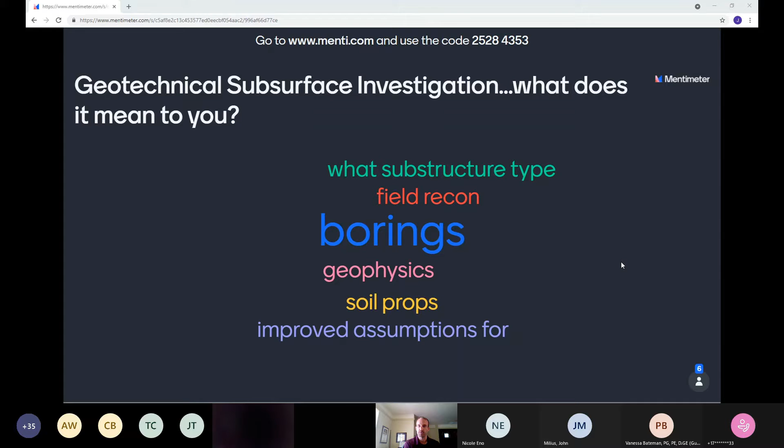All right, so it's good to see that somebody wrote borings, plural, not boring. Field recon, soil properties. Curious to know if anybody has any feelings on the idea of the cost or the expense, which is really going to be what Georgette and Vanessa go through us today. Is what happens if you don't put in the right efforts at the right time throughout the project cycle.

Valuable. Okay, I think Georgette and Vanessa put that one in there. Thank you guys. All right.

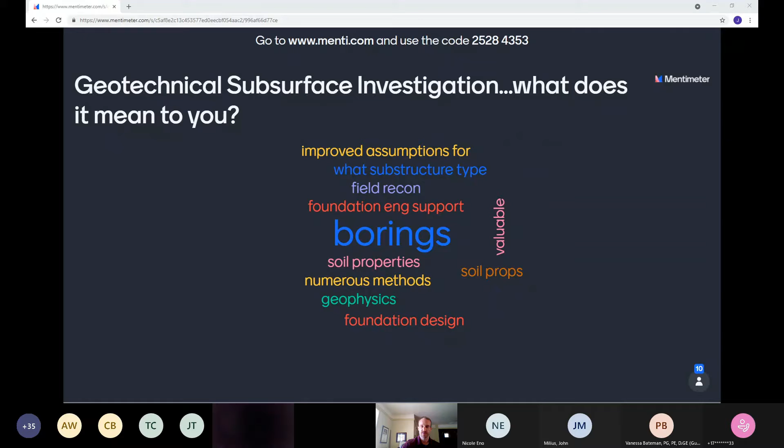So with that, I'm going to, it's all very technical answers, but borings is the highest one. So with that, we'll go back to the presentation here and introduce our speakers, and then let them take it away.

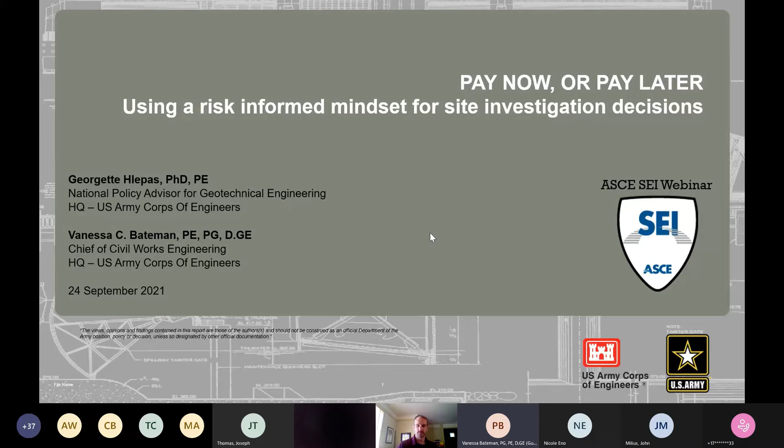I really appreciate the invitation today. As I said, this is a subject near and dear to my heart, and certainly near and dear to Georgette's as well. Okay, so risk is one of those squishy words.

People use it to mean a lot of different things. We all have different conceptions of what risks we can tolerate, and different conceptions sometimes of what risks are involved in things. So when we're starting to talk about risk, we need to think about what do we mean by that? What do we mean by that for our organization, personally, and for our project? Because certain risks are acceptable in other parts of life that may not necessarily be realized on your project.

And not every project is going to have the same level of risk. If you're doing a pole for a stoplight in layer cake geology, an area that's well explored and everybody pretty much knows what it is, the risk in the subsurface for that project will be entirely different from something that is structurally complex, or something in karst terrain. So there's a lot we have to think about, and we need to think about it in a much more structured manner. Communication is one of the biggest things here, because we need to make sure we're all using the same words, and that those words mean what we think they mean.

Risk is present throughout the project life. It's in every phase of our project. We have risks that can be realized in planning, in engineering and design. We have risks that can show up during construction, and we have risks that can show up during long-term operation.

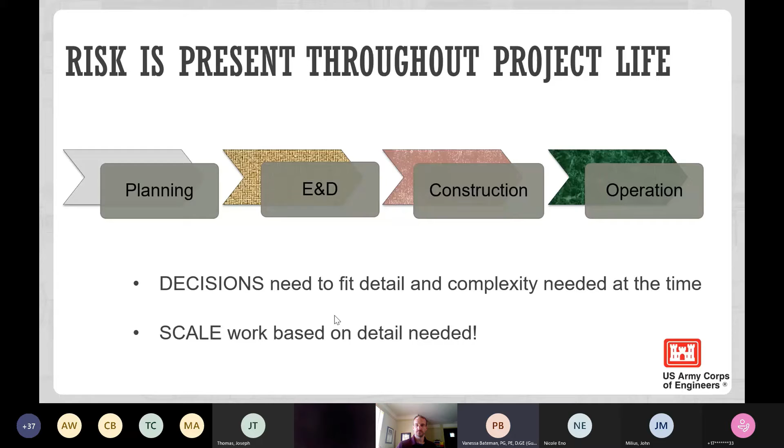Now, what is one of the biggest uncertainties we can deal with out there? It's the subsurface. If you don't know what to expect when you're laying out a site investigation, don't be surprised when somebody misses it. One of the biggest mistakes as an industry that we make—I saw this many a time, particularly in my early career—someone would say, I want this many borings. We're going to put up this square building, go drill one hole on each corner, and then write me the geotech report, and I'm going on from there.

I'm going to build a bridge, and we can't really afford all the time it's going to take you guys to get that drill rig out there, so just do one boring per pier. Well, that can work in the right circumstances, and I had many a successful bridge project with just a few borings. And I had many a not-so-successful bridge project when we said, oh, you know what, we're not going to do what we need to do to actually manage the subsurface intelligence.

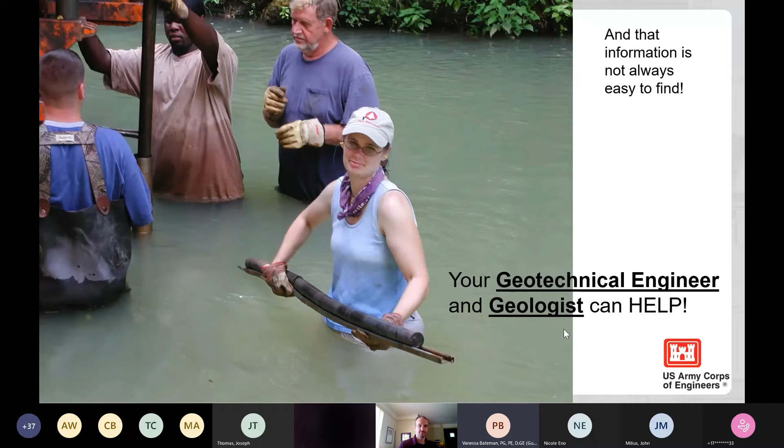So the information's not always easy to find, but don't worry—your geotechnical engineer, your geologist can help you, because part of their job is to understand the environment that you want to build your structures in. That knowledge is absolutely crucial for planning a good investigation. So, where are you in your project? How much uncertainty can your project take in what phase?

Now, if we're doing a little bit of a desk study and we're just thinking about whether or not we actually want to build this thing, we don't need the same level of detail that we're going to need during design, and we definitely don't need, in the early stages, the information that we may need during construction. And it can be asymptotic, right?

We get a lot of information to get started. We walk out there and get a look at things, and then we plan out our main investigation. And then sometimes you have to come back and get supplementary investigation.

That's the part that often drives project development teams crazy, is when you've gotten all this information and you realize, wait a minute, there's a risk here, there's uncertainty here that we haven't defined, and we didn't plan for it in the project schedule. And now you've got somebody coming in saying, about that, we need to go do this many more borings and some geophysics. And your project manager at this point, head's exploding, saying, well, why didn't you know that before?

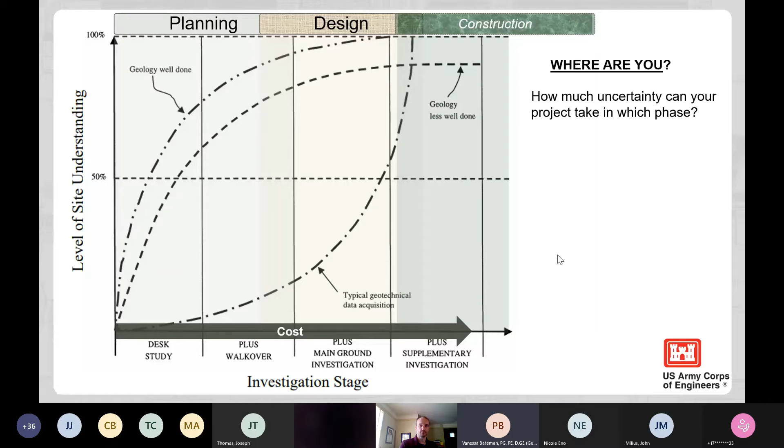Well, in some cases, we couldn't have known that. So you've got to think about where you are in the phase of the project and how much uncertainty you could tolerate. Because it's okay to make a decision that we can tolerate a certain amount of uncertainty if we can bound what those consequences are, talk about what that risk is, and sometimes the right answer is yes, accept it. Many times, however, we need to be very careful about understanding that you can accept a risk that is a little bit more than you can chew. So you need to be careful about that.

Site characterization is something that builds over time. Understanding of the ground conditions is necessary for on-budget and on-time engineering. Models are continually refined over time as understanding improves. There's a lot going on down there in the subsurface, and we need to make sure our models actually reflect the reality of what we're dealing with.

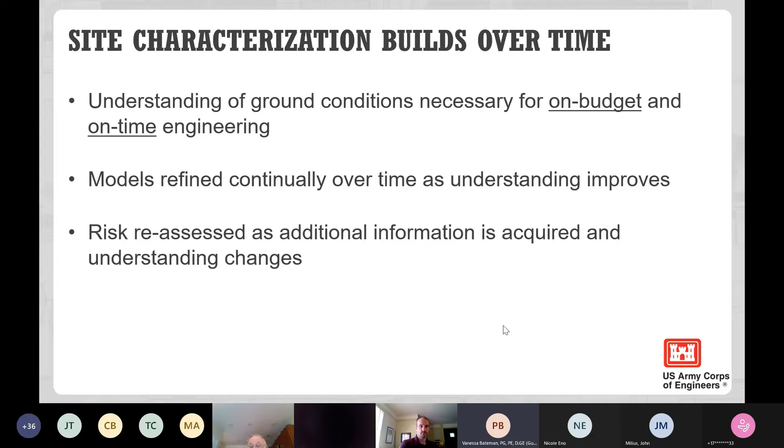And then risk is reassessed as additional information is acquired and understanding changes. And that's, I think, part of the frustrating part for some people: you expect just one answer. And that's great, we love to only have one answer. But the problem is, if I only give you one answer in the planning phase, and when I find new information in the engineering and design phase and don't take that into account and make adjustments, then my site characterization that provides you the information you need to design these foundations can go wildly wrong.

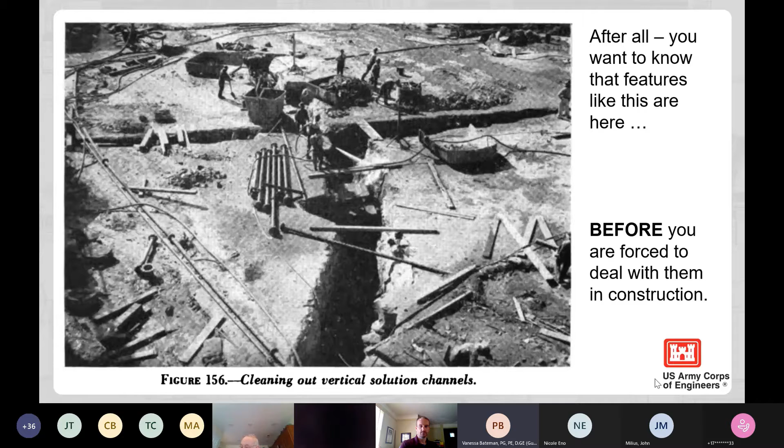This picture on your left is from one of my projects. This is not what you want to find underneath your bridge spread footing. So this was actually a contract job, it was one hole per bridge pier. The rock was absolutely gorgeous, no flaws in it whatsoever.

But what are you looking at over here on the left? Right, large karst feature, right underneath one of the substructures. We had to redesign the footing in the field, right then. Okay, so one hole per pier, that may be appropriate in the right circumstances, but it is never what you should assume for every project, right? You need to be talking to your geotechs, talking to your geologists about the level of uncertainty and the problems that the ground can present.

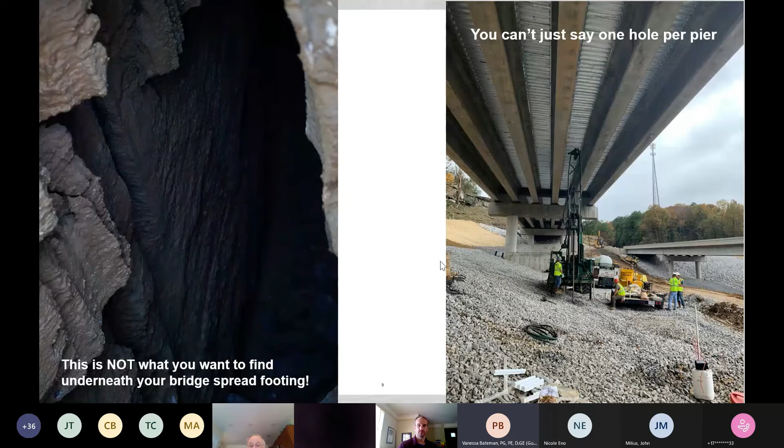And we should scale our investigations based on that information. So let's look at another example. This is, I love this picture. We've got a geologist for scale here on the left-hand side. So if we put one borehole in, well, I might see an enormous cavity right here where my geologist is standing. I might see pretty good rock, and they can be right beside each other.

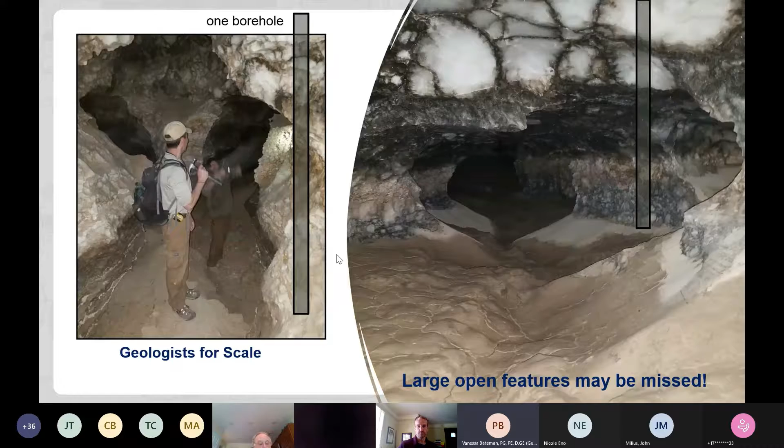And the way you deal with that, because we're never going to drill everything, we're never going to have the perfect number of holes, is you have to understand what the ground is likely to be presenting to you and design your site investigation around that. So again, it's this kind of risk decision making where you're thinking about what could go wrong, what happens if it does go wrong, and what do we do about it.

So this is just a little diagram, actually out of the best practices manual that the Corps and the Bureau of Reclamation put together. Evenly spaced boreholes that are vertical may not be what you need.

In this case, this is actually a rock cut. We've got some relatively evenly spaced borings, and this tan stuff is soil. The dashed line is the interpreted top of rock. Now, if you saw this with just the 3 borings, you'd think, oh, okay, fine, and maybe you wouldn't even think about it. But now that I can show you the overlay of what's actually in the ground, you can see very easily how 3 vertical borings can really mislead you about what's happening.

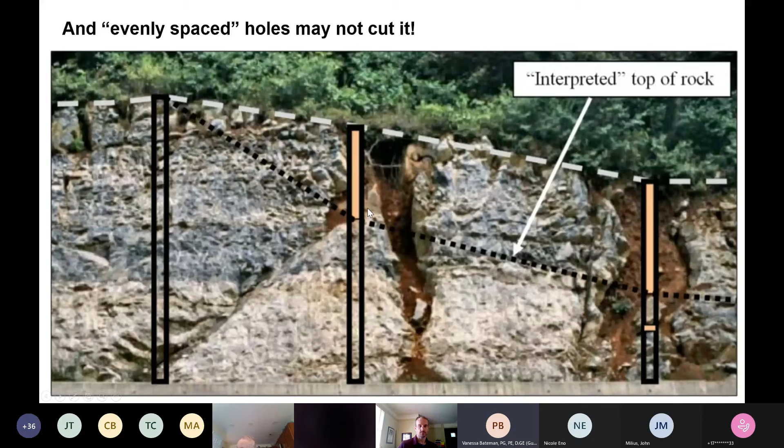And you can imagine there's definitely a different construction cost if we have to remove all of this rock and we thought that was soil. So a lot of times what we'll end up doing is rejiggering how we do things, maybe adding more boreholes. Look at the blue line versus that black dashed line for where the top of rock actually is.

Also, when you've got vertical features, we do a lot of inclined holes. Inclined holes can be a little more expensive, and they're not appropriate for every situation, but we routinely do this underneath dams when we do grouting projects, precisely because vertical holes are really, really bad at capturing vertical features.

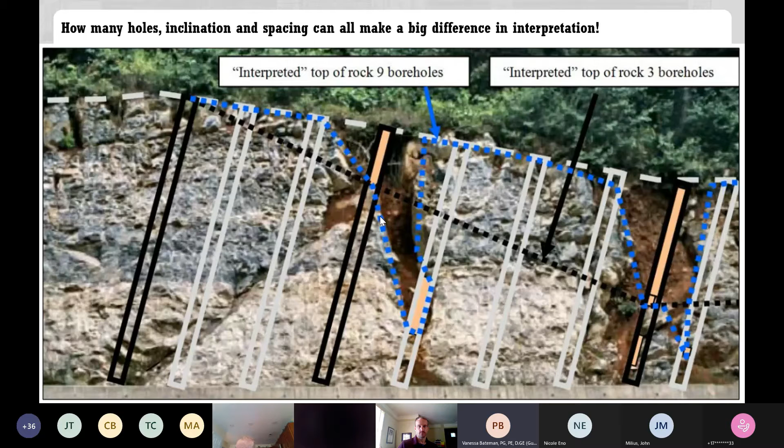They're easy to miss. So think about what the problems could be with how you're designing your investigation, and then roll in from there. Let your geotech and your geologist help you. Here's the site—come back and tell me what you think you need.

Let's have a discussion over the risk tolerance that we have for this project, the schedule that we have for this project, and let them pull some old information, because what you may find is there is a lot of old information that would be extremely helpful for how you're planning out your site investigation.

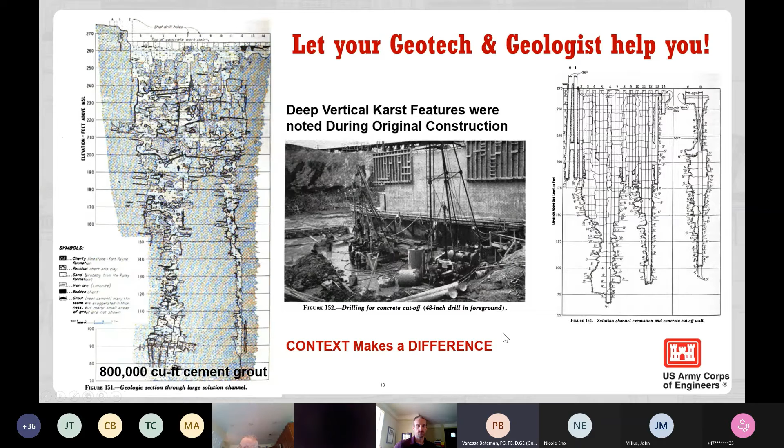This is actually from Kentucky Lock and Kentucky Dam. Massive vertical karst features beneath that. We're actually in the middle of constructing a new lock at Kentucky Lock, and we knew, because of the previous construction, to expect features like this. So that was incorporated into the design.

Because you can anticipate this, you're going to reduce the impact of cost and schedule risk on your project. If you suddenly find a massive karst feature like this underneath your lock construction, and then you have to negotiate how to deal with it in construction, of course it's going to cost more, right? That's going to make life more difficult for everybody.

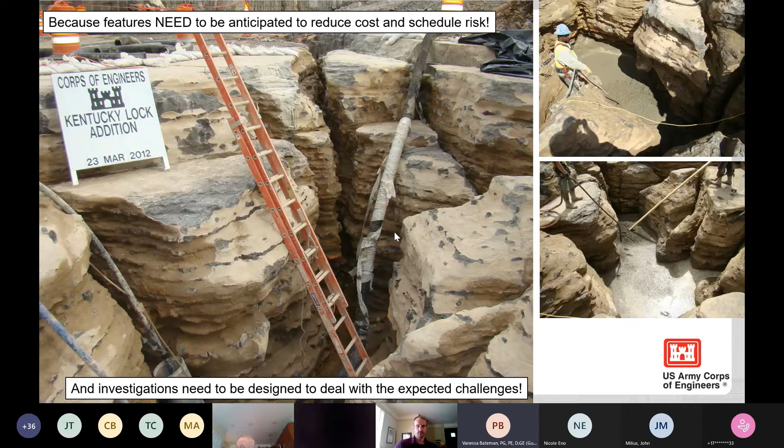So we've got to design our investigations with the idea that we need to understand what's happening in the subsurface first, or what's likely to happen. So what are the kind of risks that we're talking about? Well, we're talking about risks that lead to certain consequences. I'm not worried necessarily about risks of, say, so-and-so didn't read my report.

Project design failure—the design does not work. That's a big risk; we don't ever want to see that. Life loss or safety implications—that's definitely a problem. If our bridge falls down after we've built it, it looks bad on everybody. Property damage—you definitely don't ever want to be in a situation where you have life loss from your project, or property damage that adds to the cost of the project.

Project cost growth and schedule delay—how critical is that schedule for you? Maybe this is the first in a series of projects, and if this one misses it, it has this cascading effect on a whole bunch of other projects. And cost growth—everybody's always going to be concerned with how much something costs. When we make promises on projects about what the cost should be, our clients, whether you're working for a private AE firm or for the government and it's the taxpayer, they're going to want to know why suddenly it costs so much more. And you have to be able to explain that.

And then there's also public perception and reputational impact. If something goes badly wrong publicly on a project, that is a risk, and it can lead to problems for your organization.

So why do we face these kinds of consequences? There's been a lot of ink spilled over this over the years. This one's from 1981: 90% of dam failures in history have occurred because of oversights that could have and should have been avoided.

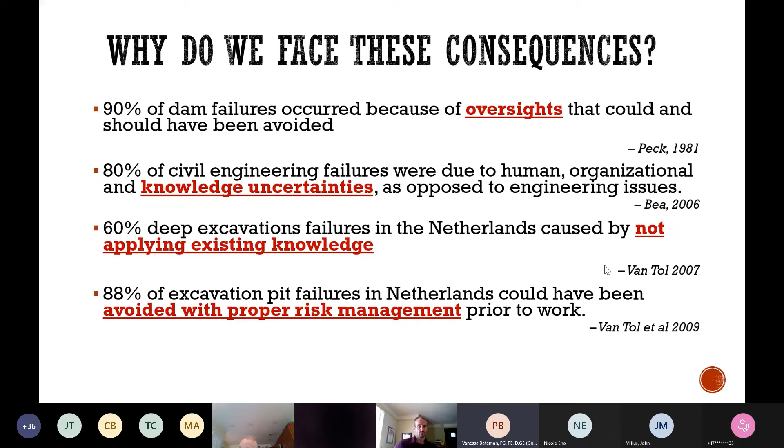88% of excavation pit failures in the Netherlands could have been avoided with proper risk management prior to work. Wow, those are some big statements, and all of these are published in the literature. This is nothing new, and as you can see, from 1981 to 2009, there are plenty of other examples in 2020 and 2021.

All right, subsurface related impacts. 80 to 85% of European building failures are related to ground problems. That's from 2004, and I don't think we've gotten that - we've gotten that a lot better.

50% of project delays are caused by adverse ground conditions. Despite the absence of definitive statistics, most experts would agree that the incidence of geotechnical disasters has increased over the last 20 years. And that was written in 2011.

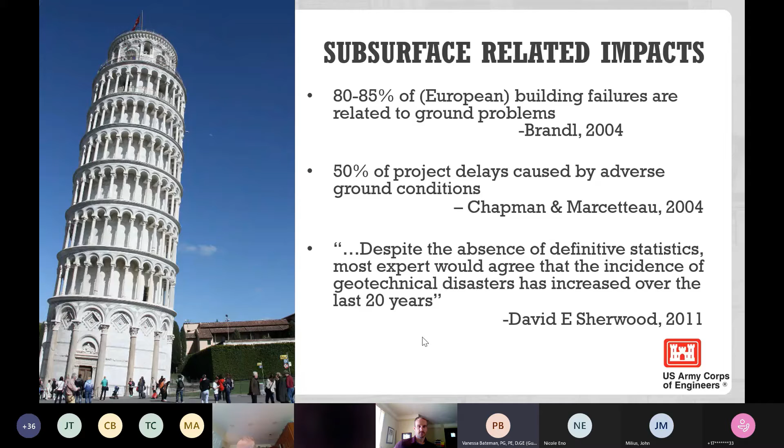Wow. Okay, now I know I'm talking to a bunch of structural engineers, and you probably are all going, yeah, you geotechs, man, you don't know anything. Well, we do. There's a lot of issues that go into this. There are a lot of decisions we can make in a project that bake risk in, and people don't always realize where they're baking that risk in. That's one of the reasons why, as an engineering team, we've got to be communicating back to our clients, project managers, and stakeholders what the risks actually are versus the costs and benefits of the project and the costs for construction.

So a couple of examples of some geo-related risks, right? Soil and rock mechanical properties - this is a picture of one of the cutoff wall constructions. If, through a dam, the rock is significantly harder to cut than we think, that is an expense. Depth to rock, unexpected subsurface materials, groundwater elevation and pressure changes, internal and surface erosion, and insufficient investigation to sufficiently mitigate the subsurface risk - that's really what gets us.

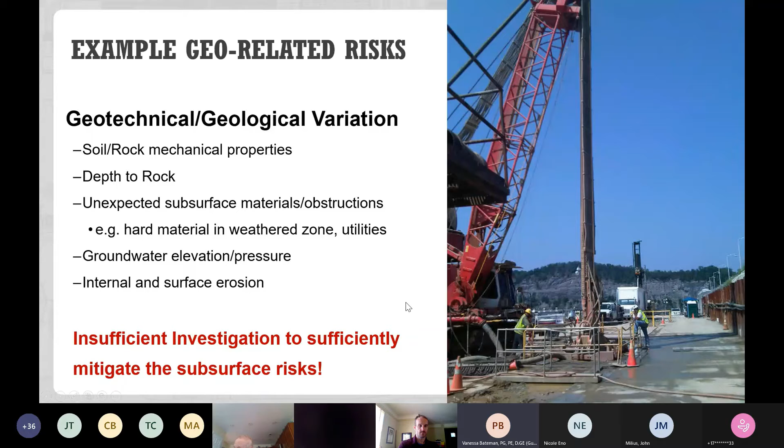All right, so this is from an NCHRP study - this is a bunch of highway departments. It's not entirely comprehensive, maybe it doesn't capture absolutely everything, but they came back to the highway departments and agencies and said, hey, how much are you spending on subsurface change orders? And they're coming up with rather a lot of money. Qualitatively, it's a priority concern for most agencies, but many agencies were not able to actually quantify the exact amount.

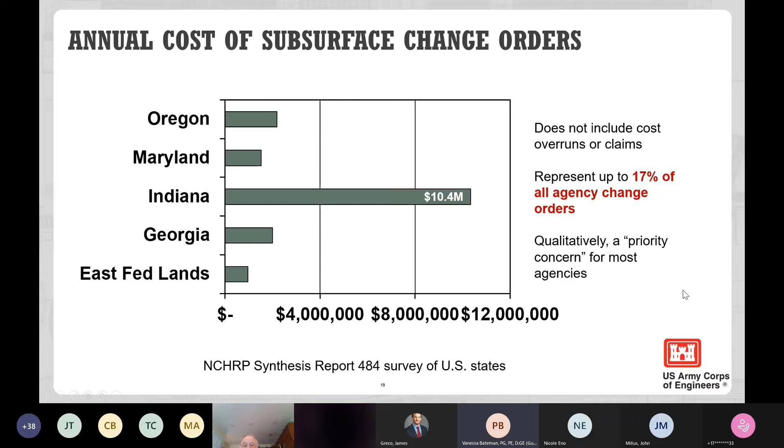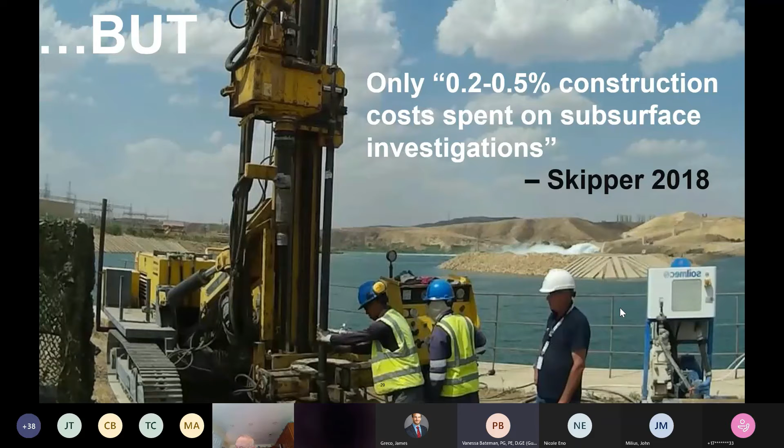But you can see here from Indiana, it can be a fairly substantial part of their budget, representing up to 17% of all agency change orders. But we're spending only 0.2 to 0.5% of construction costs on subsurface investigation. So you've got to stop and think, hey, wait a minute - maybe if I'm slicing the site investigation down too far, that has a cost we are realizing later in the project.

Now, at Corps of Engineers, we've been looking at some of this as well. We definitely have some of these issues, and what we're seeing is that it varies across project types. On a really big project, we do a ton of investigation, and you see these claims be a lot smaller. But in terms of total cost for our program, roughly in the last 5 years, it's accounted for about $25 million each year.

Well, that adds up after a while. That's money that, if we could anticipate ahead of time, could be spent on other projects. And certainly we've got a number of delay days - again, this sounds like a lot, but this is not one project, this is the entire civil works portfolio. Roughly, it's coming out to, in some of our early numbers, about 3%. Well, if we're going to pay 3% on the back end and only 0.5% on the front end, we have an opportunity here, right? We have an opportunity to make things better. Now, sometimes these things are unavoidable.

There are residual risks, and we're going to talk about those in a minute. But there's definitely an opportunity here to save some money, to do a little bit better, to push things forward, and to have more funds available for other projects.

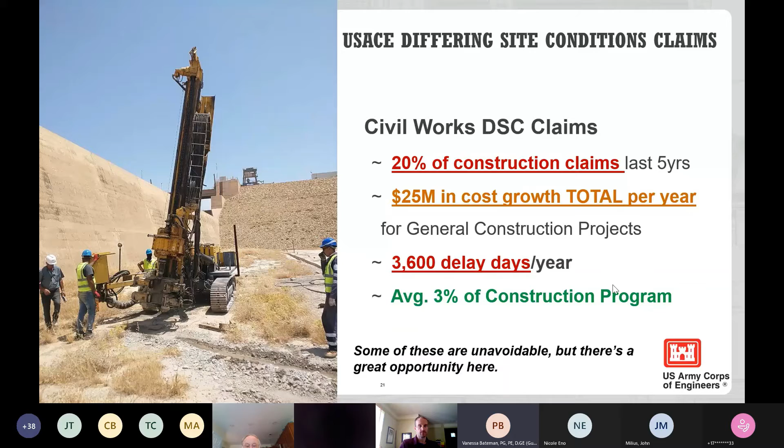This came out of the NCHRP study, along with a couple of USACE data points. What you notice is there's got to be an upper bound. The answer is not 40 million borings. The answer is the right borings at the right time in the right place, using the right tools. But we can definitely see that when we're not spending very much on our geotechnical investigation, we have a whole lot more spread and cost growth.

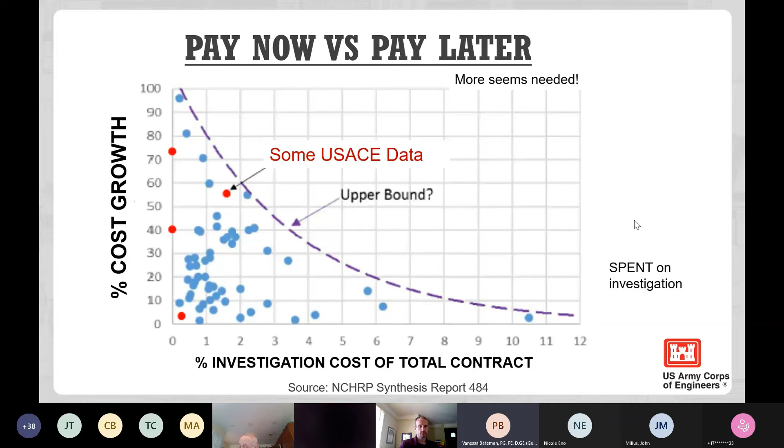So a lot of folks are looking at this kind of chart, gathering even more information, because we want to try to define this a little bit better. We want to go after the right projects as well. You may have some kinds of projects where you have very little problem, and certain types of projects where we have a lot. We want to be able to look at that and define it.

So how much info do we need? Drilling more holes is not necessarily the answer. I love a drill rig. I started out my career behind a drill rig. And I've definitely been the person everybody's rolling their eyes at in the room, saying, oh my gosh, she said she needed 5 more holes. But there is no one size fits all.

You've got to come at this with a risk mindset. You've got to come at this with good engineering judgment. And you've got to think about what is the price we are going to pay if it goes wrong. That's the kind of thing you need to be making sure you're bringing in.

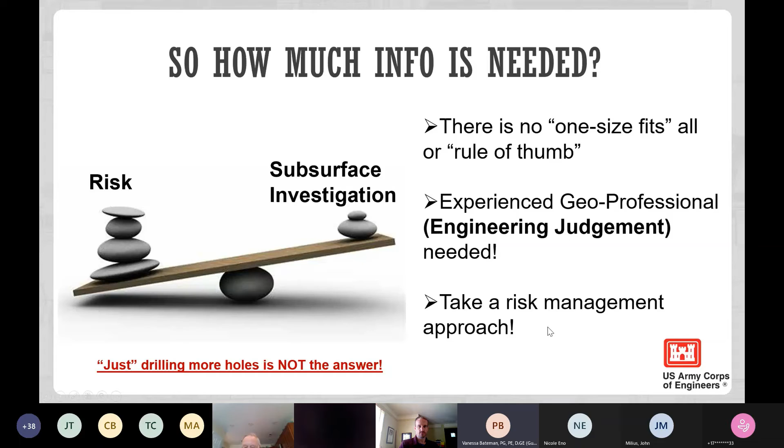So I'm going to get into the discussion of risk management. The definition is a systematic process of identifying, analyzing, and responding to risk for the entire project life cycle. I put that in there because it's something you're going to look at from planning through engineering design and through construction, all the way into operation and maintenance, to make sure you understand what is going on in your project and what information is changing your understanding over time.

So in order to do a risk management process, you would start out by first sitting down with a team. And of course, when it's a project that involves anything founded on land, you're going to need a geoprofessional. You need a geotech or a geologist, and typically both would be preferred, especially if you're drilling into the subsurface, to help you identify risks.

You're going to identify your geotech risks, your hydraulics risks, your environmental risks, all of those in a portfolio fashion. For geotech risks, you'll work with your geoprofessional to establish, now that I've identified those different types of risks — like where's top of rock, and could I miss that, or might I have a dewatering issue — what is the likelihood that I'm going to have that realized, and what are the consequences? After I look at that, I'm going to rank those risks and prioritize what I'm going to address, establish a path forward, and then manage the risks over time and update my understanding, making it a living type assessment.

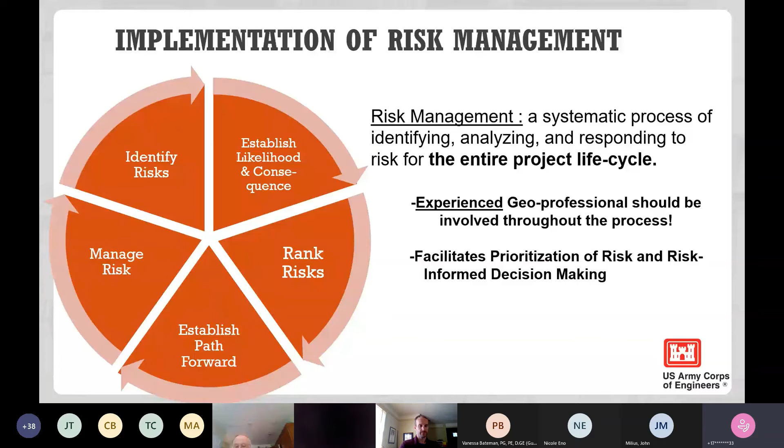Okay, so I'm going to walk through — once you've identified what the risks are on the project, and we're not going to go through that exercise since it would take some time with your team, but once you have, you'd walk through each and every risk systematically and identify what is the probability that risk is going to be realized.

This is for a specific project that we use, and this might be different for your project needs. The idea is to communicate with the team, what do we mean by a very high probability or a very low probability, and all be on the same page and establish that for the risk. Then you're going to go in and look at, now that I know what the likelihood is, what are the consequences of the risk being realized?

If you could forward a slide.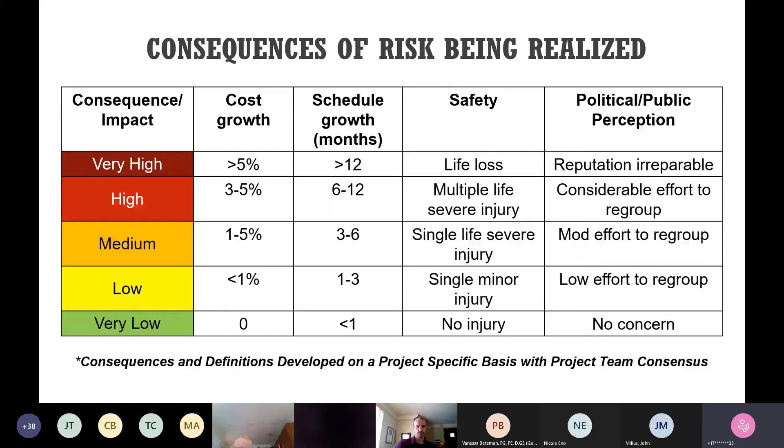But once you've sat and identified, okay, what are my risks? What are the likelihood of occurrence? And where's the probability? I'm going to put that all together in a risk matrix. Again, this is for each risk. And I'm going to say, well, if I have a very high probability and very high consequences, man, that resultant risk is really severe. I'm concerned about that, so I'm going to put that as a high priority to address in some way.

If it's maybe a medium probability with a very low impact, okay, you know what, that's considered a little more minor. So I might not want to address that the same way I would address something that had a severe resultant risk. And of course, if you had something with very low probability and very low consequences, that could be negligible, and you can maybe even look past that one and really focus your priority addressing those severe and substantial risks.

Let me go to the next slide.

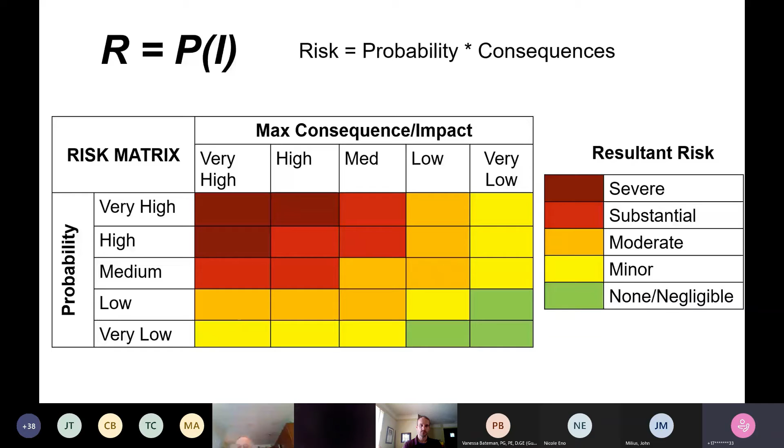You might say, you know what, I think I have a really high risk of not really being able to build this project here, because I think the top of rock is really not low, but I don't know for sure. But as time progresses and you obtain more information, do some subsurface investigations, you're going to have an increase in your confidence and your understanding of what's going on, and you're going to readjust what you think that risk is. And it's either going to go lower or higher, and it's going to make you change your decision on course of action. And that's where I'm going to get to next, is this established path forward.

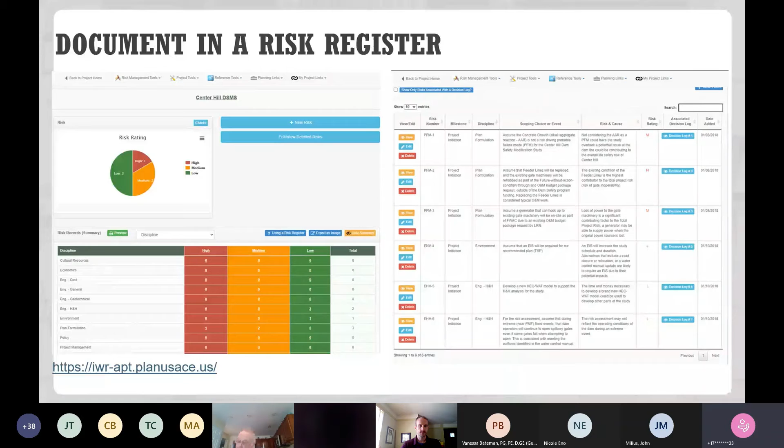You could transfer the risk. You could say, hey, you know what, I'm going to put the risk on the contractor and say they're going to deal with it. But of course, that's going to come with a pay increase on the actual contract cost. You could say, you know what, I'm going to avoid the risk. I'm going to change the project plan and try to eliminate that risk and protect the project from these impacts. That could come at a cost as well, and it can also come with upsetting some folks who wanted the project to look a certain way or be in a certain place.

The other option is to accept the risk. You could say, hey, you know what, I'm okay with this risk. I think it's fine. I have built in some contingency. I'm going to go for it. And if it happens, I will plan for it, and it'll be okay. And that's done in a lot of projects. Next slide, please.

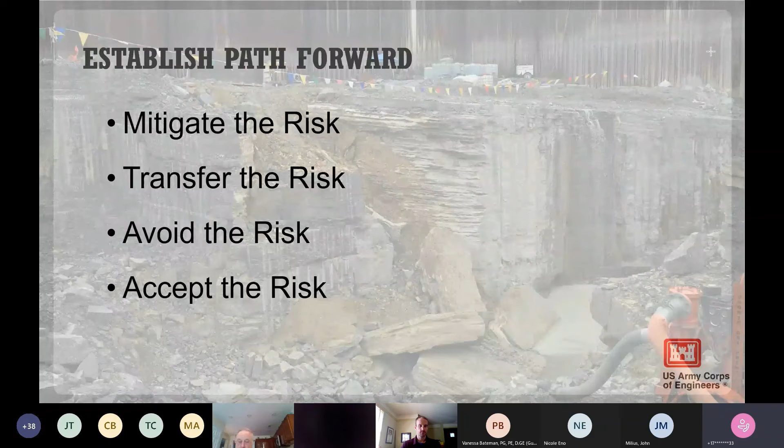Making sure we don't just do this once and walk away and say, at the beginning of the project I've identified my risks, I think they're low, I think they're fine, we'll keep going. It may happen as you progress through the project and get more information, you realize my risk is a little higher than what we originally estimated, and we need to change our plan over time to make sure we're mitigating appropriately, or walking into it with eyes wide open.

We have to communicate the changing of the risk over time. Vanessa touched upon that at the beginning. As you go from planning into engineering design, there's always a question: you got some subsurface investigation, that should be enough, why do you want more? Well, our understanding is changing, we see something here we didn't see before, and communicating that is critical. I'll show you some examples of using visualization to help with that communication in a minute. But that new information can definitely be a game changer.

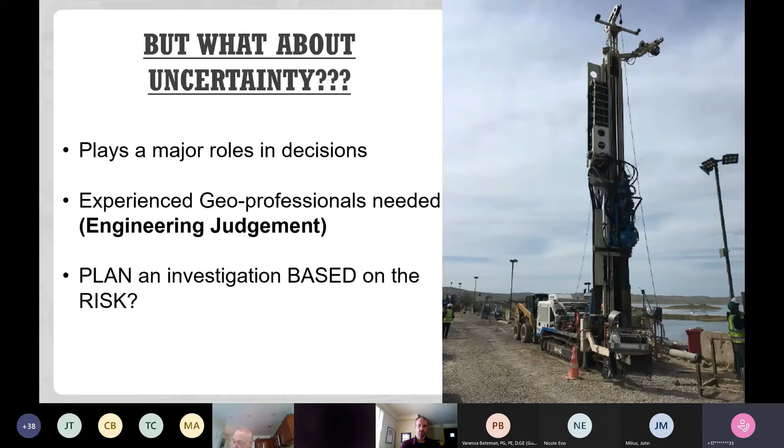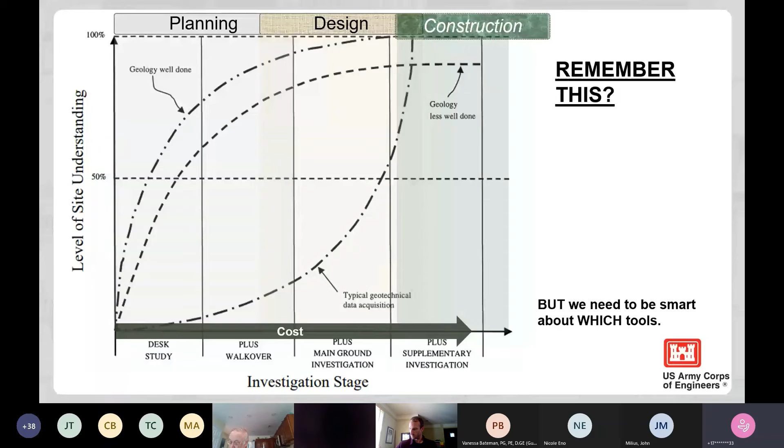There's a lot of tools out there, but you need to consult the geoprofessional and say, hey, can we use some CPTs here instead of borings and maybe gather information that way? Would that speed up the process? Is that sufficient for this project? Your geoprofessional will tell you, yeah, we can fill in some of those data gaps and provide you more information and identify other areas that we might want to target a little closer.

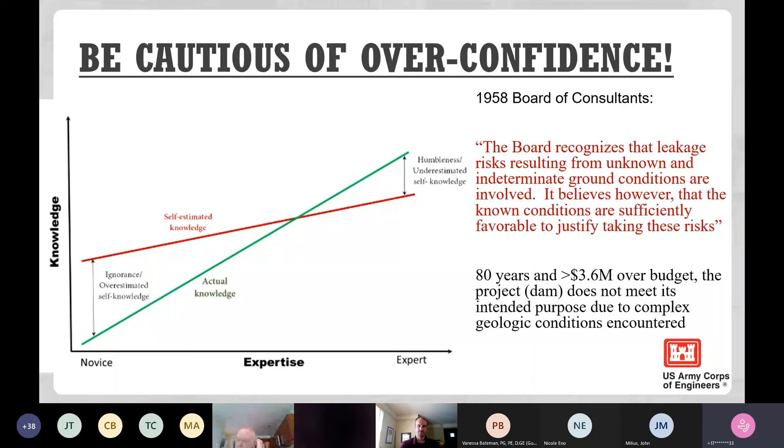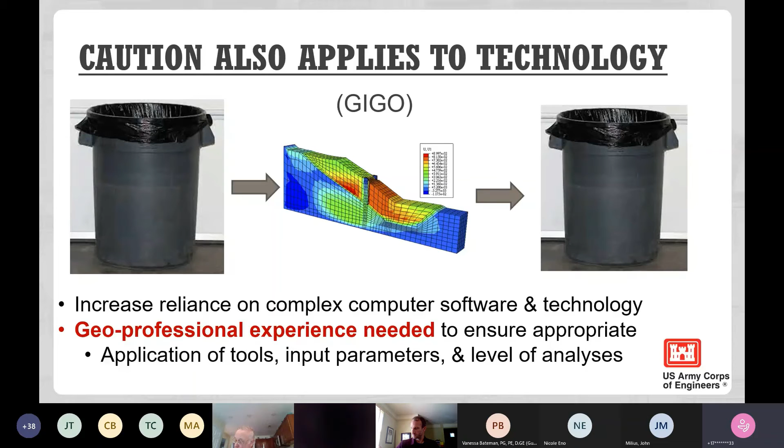Caution also applies to technology, and you folks probably see this as well with a lot of the analysis you do. We're increasingly relying on our computer software and technology, and those are getting increasingly complex. Especially when it relates to geotech, we want to make sure the geoprofessional, an experienced one, is involved to make sure that not only are we using the tools and applying them appropriately, we need to look at those input parameters. Do we have enough subsurface information to really put a good estimate on what the different subsurface parameters are? Are we relying on one boring for a 3,000-mile stretch of levee?

If that's the case, then this is garbage in, garbage out. We really need more information to understand what a good set of parameters are. We also need ground truthing. You cannot engineer from a desk. You need to get out into the field and do a site visit and understand what the topography looks like, what the exposed geology looks like, what we know about the area, and when we see our data coming in telling us something, does that make sense?

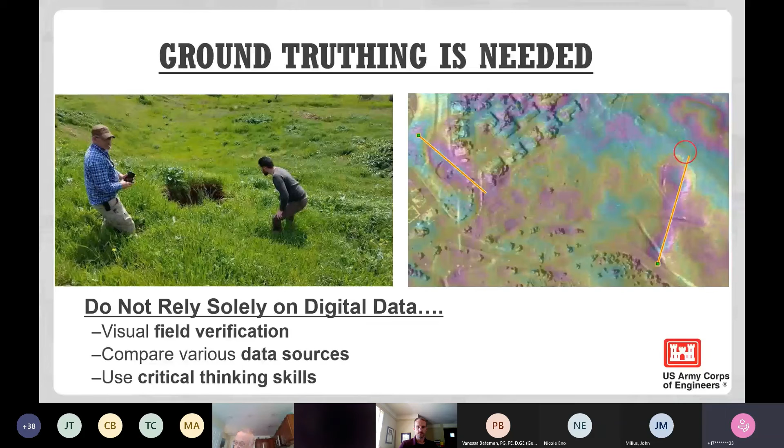Data management, visualization, communication are critical, and that's true for every discipline in engineering. You can grab your historic data, maybe it's in some files, you have some digital data, some models, pulling them all together and using them to explain what's going on is the best way to communicate the needs of the project and understand if your project is actually performing as you want in the end - not just in planning, but all the way through design and post-implementation.

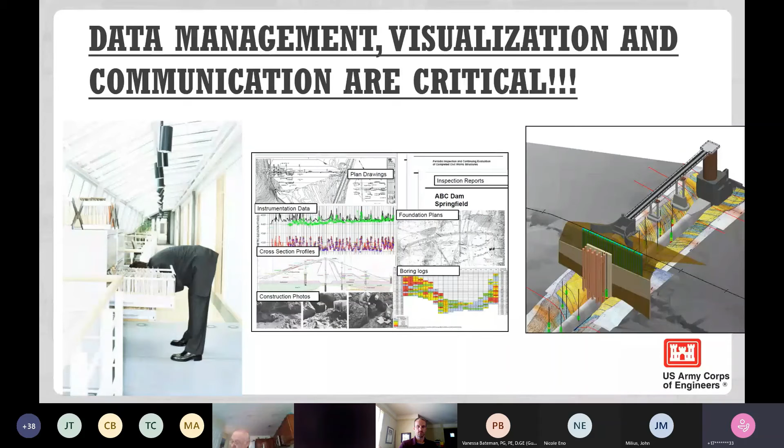Here's an example, an overview of a dam project going into design. Those yellow triangles with exclamation points are areas where there were potential concerns with the project. The idea is to better understand these potential concerns, which happen to be related to seepage and piping in the foundation, and what design we need to address them.

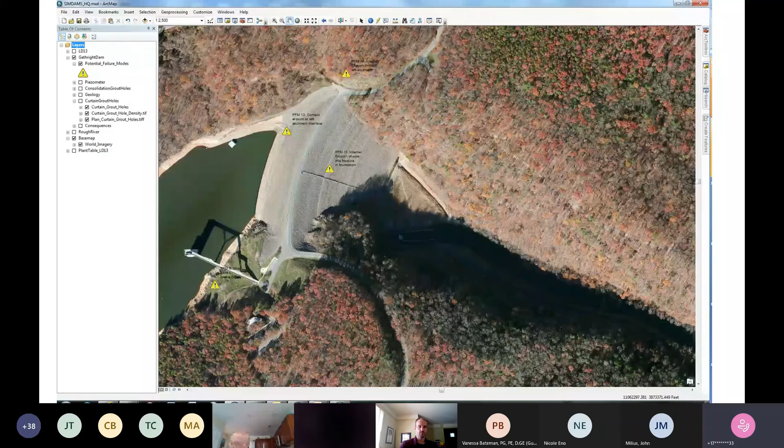Of course, you need some sort of desktop level study to understand what we know about this project. You see an overlay here of an old drawing that was pulled out, showing grout holes that were done as part of original construction.

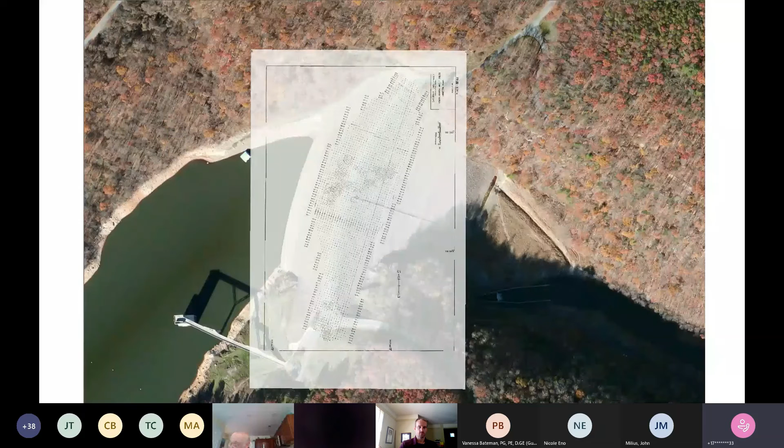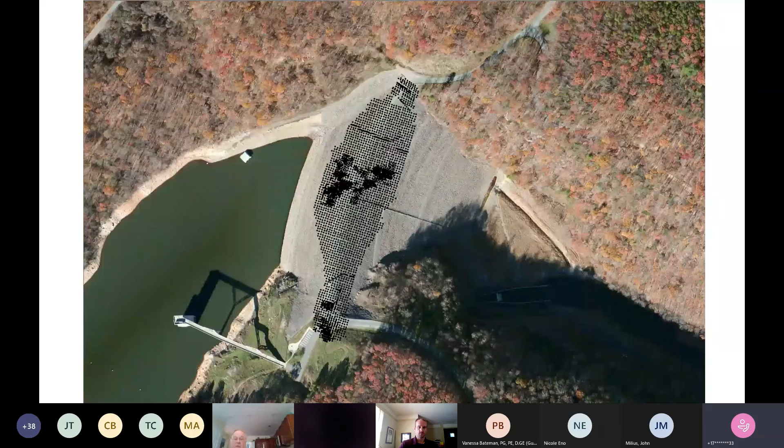What we did is take those grout holes and digitize that information to see where all these places are geospatially located. You can see a concentration of holes, just quantity, in certain areas in the center of the dam and also on the right abutment.

Now I can plan and target my subsurface investigation to better understand what's going on and put those boreholes in locations that make sense. I can overlay where I have existing information, identify those gaps, and plan accordingly.

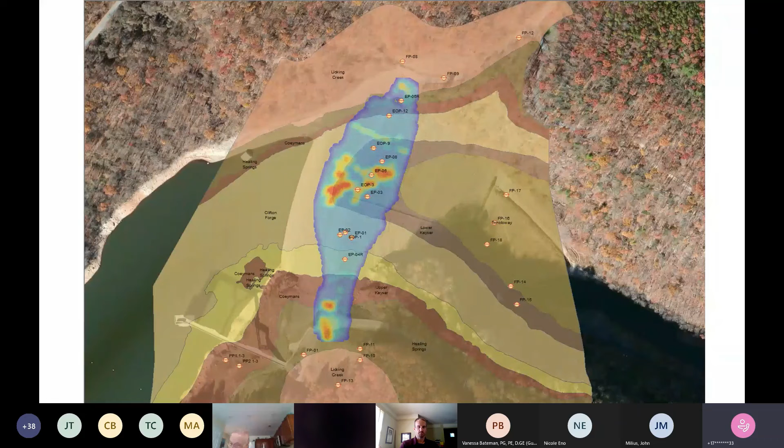I'm going to show you another project here. This one is Pine Creek Dam. This is just an aerial view, looks a little bit 3D, pulled in GIS.

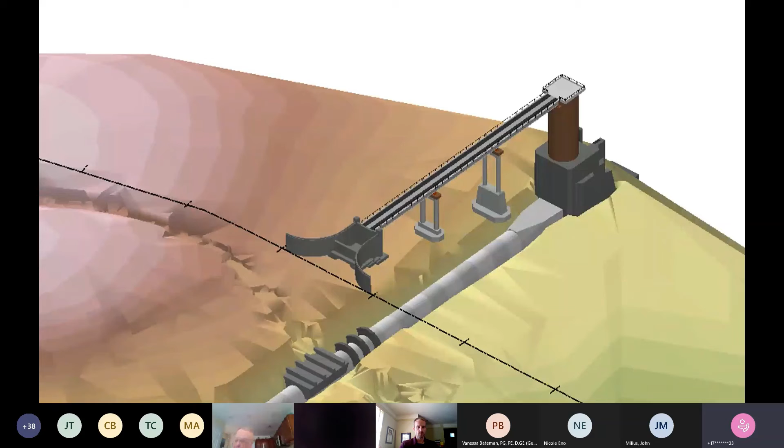But if I strip away that surface, I can expose where I have information showing where top of rock is. I can also see my intake tower connecting to a bridge, and the bridge connecting to the center line of the dam, and I have a conduit going from upstream to downstream.

I can overlay my subsurface investigation results and really clearly articulate that I put up a bunch of subsurface investigations along this conduit, and I have some standard penetration test results that show some concern along this conduit, which could lead to seepage and piping.

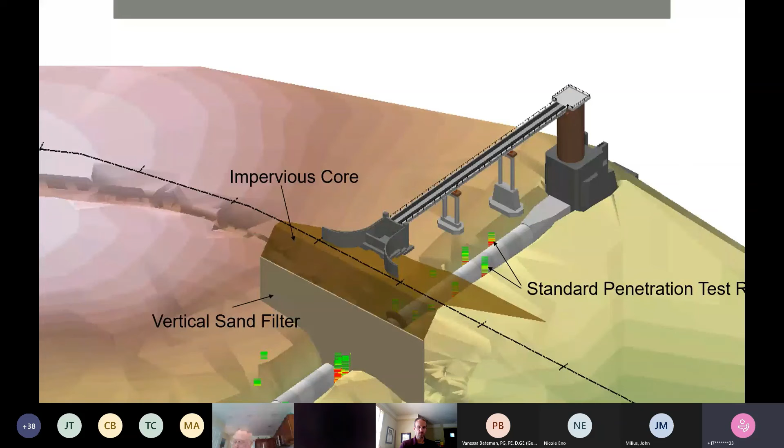Looking at where those are, and then looking at additional information about the impervious core and the vertical sand filter at the dam, I could say this ultimately led to a modification of the project, but it was really easy to communicate the need visually by pulling this data together. Ultimately, we had a new barrier wall, a concrete secant pile wall placed in along with new sand filters.

But the other thing we can do is not only plan and explain why we need to do what we need to do, but during construction, we can actually monitor the project over time and look at these concrete panels and say, what are the different test results I have, and let me spatially locate them.

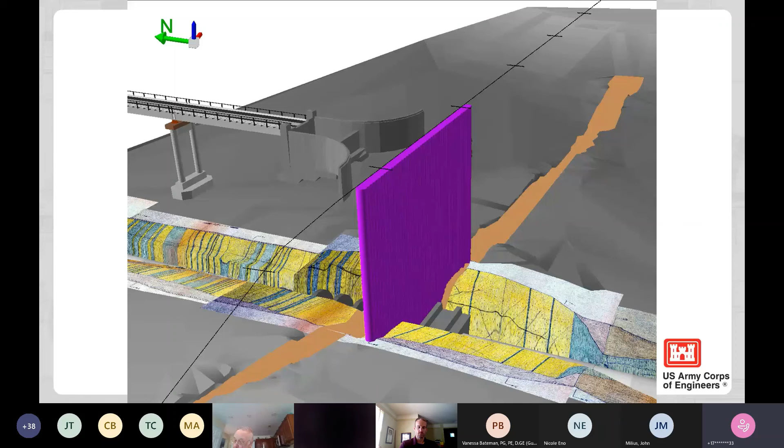Then let me look at the test results and say, are there some areas of concern? Where are they? Are they in critical areas? Are they at the ends of the wall that are maybe a little less critical? Are they near the conduit where I might be more concerned?

Then I can take these in different views and say, I want to understand where I thought top of rock was. Where was top of rock? How far into top of rock did I get my panels? And did I meet those overlaps?

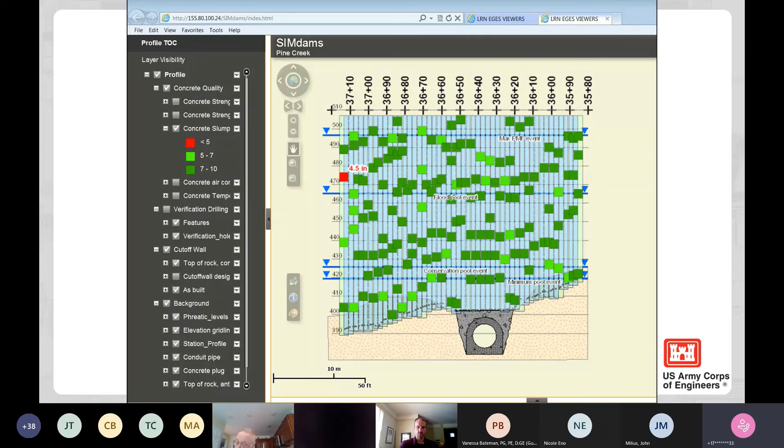And what were the test results for that concrete? Was my concrete slump meeting specification? And if not, can I highlight that and see it spatially? Do I care that the leftmost side of this has a 4.5-inch slump instead of greater than 5?

I could also say I want to do some verification drilling, and I want to verify that the concrete quality meets what I specified out, and I have no concerns.

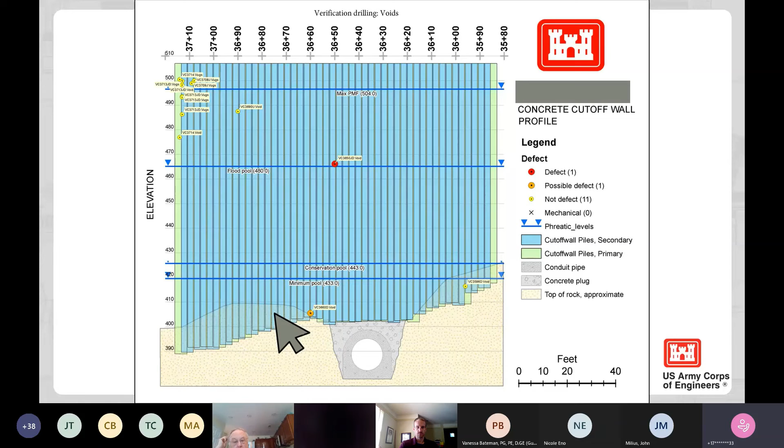So what we typically do is put some cores through these concrete secant piles, pull out the cores, and sometimes put in optical televiewers. We use the optical televiewer to create a borehole image of what is in situ inside that wall, then go through and identify areas that may be suspect or may have a potential defect.

If we locate these spatially, we can click and say, alright, this one may be of concern because it's near the bottom of my secant pile, near where my conduit is, my area of concern. But I pull up my image and can make an informed assessment: is it a risk to keep this there? Do I need to do more in my design? Do I need to reinstall a pile here? Or can I accept this given its location?

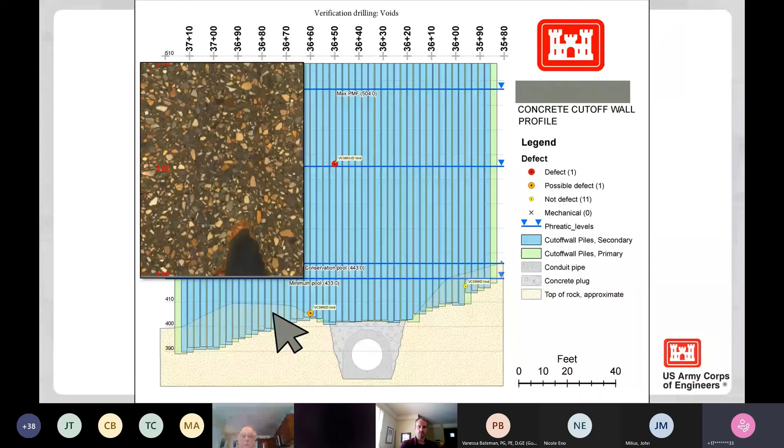So we didn't talk about this much. We keep talking about top of rock and joint features, but we often have problems with groundwater—what are those piezometric pressures? And just like with the other examples I showed you, using digital information and managing and visualizing it, a picture is worth 1,000 words.

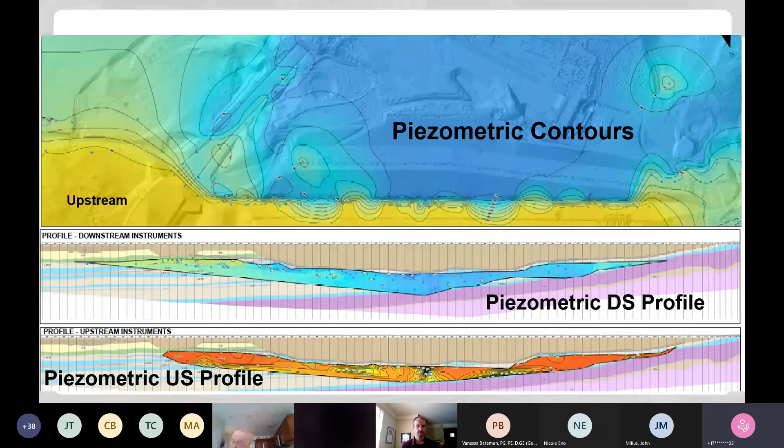I'm not going to go into detail on this, but it was to help communicate visualization of information, being able to explain to someone what you're seeing and what's going on.

And always remember, we've gone through a lot of discussion so far, but we can reduce and mitigate risk. We can do a lot of subsurface investigation, geophysical exploration, but we can never eliminate the risk. It's said best by this quote: residual risks are unavoidable because ground is the greatest uncertainty in civil engineering.

You can see this example on the right—it looks like a cartoon, but it's pretty realistic of one of our projects. You can see boreholes completely missing one very large karst feature, and only one of those 5 holes actually hitting a very small, relatively small feature that was fairly deep in rock. So you can do a lot of investigation, but you're never really going to eliminate that risk. But we can do the best we can to plan accordingly, make risk-informed decisions, and target our exploratory programs to reduce uncertainty and better understand the risks we're getting into.

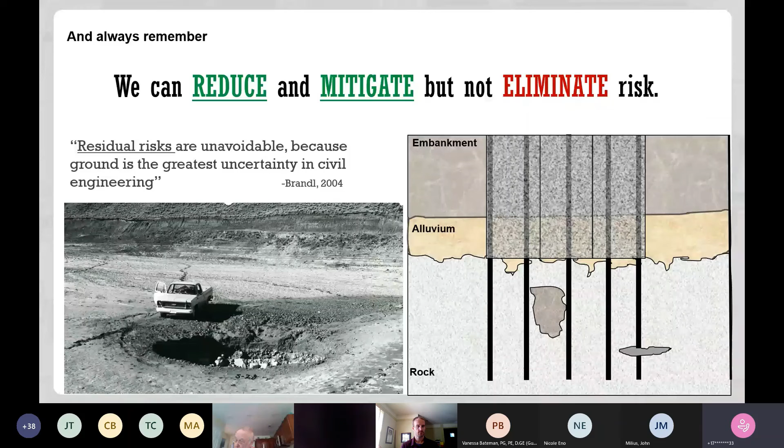Okay, I have a quick case study I'm going to go through, a tale of 2 water control projects. This clearly shows what we've seen a lot on a lot of projects. You've got a southern structure, and you have 2 northern structures. This is why good site investigation and geotech engineering matters.

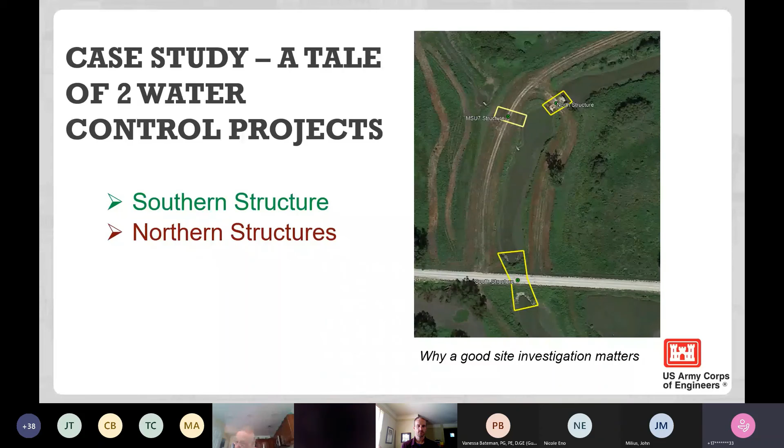So our southern structure had some site-specific characterization performed. Multiple borings and traditional geotechnical analysis were performed to understand what's going on. The geotechs and the structural engineers sat down together, coordinated, employed shallow foundation footings at the site, and highlighted that some water mitigation was needed, so they addressed that by installing mill sumps and water collection trenches. This project went really smoothly—no cost growth, no time delay, risk was mitigated with subsurface investigations. That's awesome.

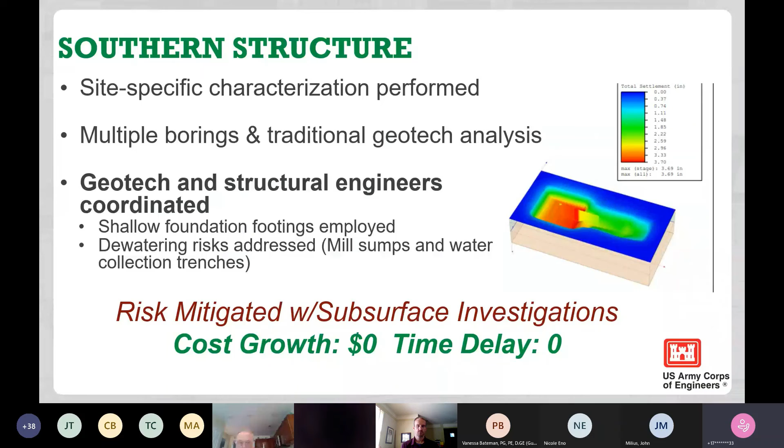So what happened here is what happens on a lot of projects. Something came up where additional features wanted to be constructed, very similar—water control structures—but these were on the northern end of the project. So the geotech said, we only have 1 boring in this vicinity, and based on what we know in the area, this is highly variable geology, and we're concerned that we don't have a good understanding of this area. We need to do more subsurface investigation, and we want to perform additional analysis to make sure we're designing appropriately. Of course, project management came back and said no, that's going to be time delay and cost. We don't have the time for you to do more analysis. You have enough information, we've done this before. We're going to go ahead and accept the risk and go forth with the project. You guys have never seen this happen, right?